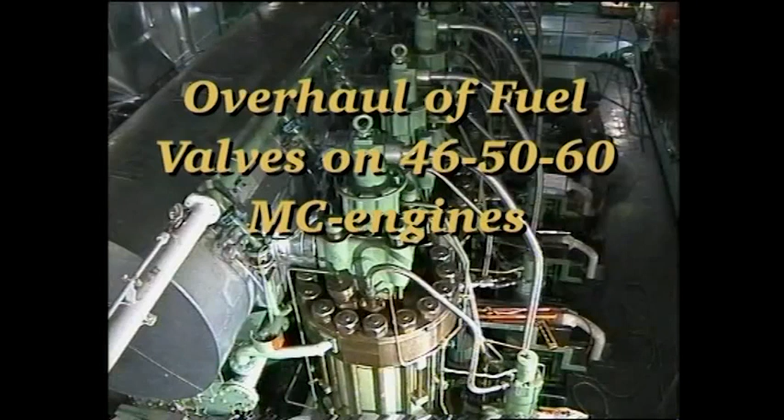Overhaul of fuel valves on 46, 50 and 60 MC engines. See Instruction Book, Volume 2, Procedure numbers 901 and 909.

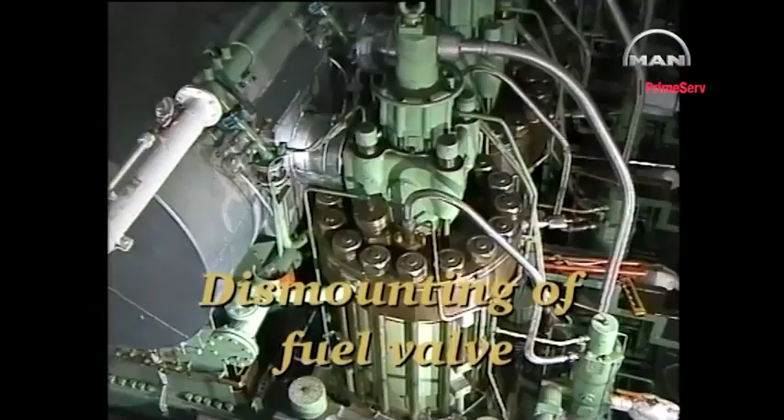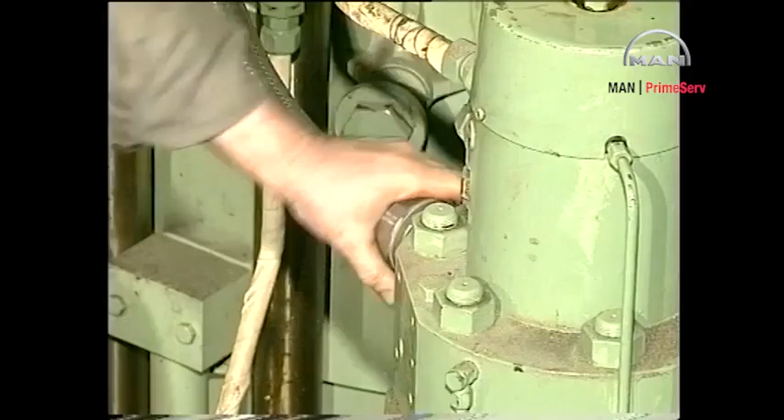Before any dismantling, drain the fuel oil from the fuel oil high pressure pipes. Using a hook spanner, loosen the union nut. Using a spanner, loosen the coupling pieces fitted on each end of the high pressure pipe.

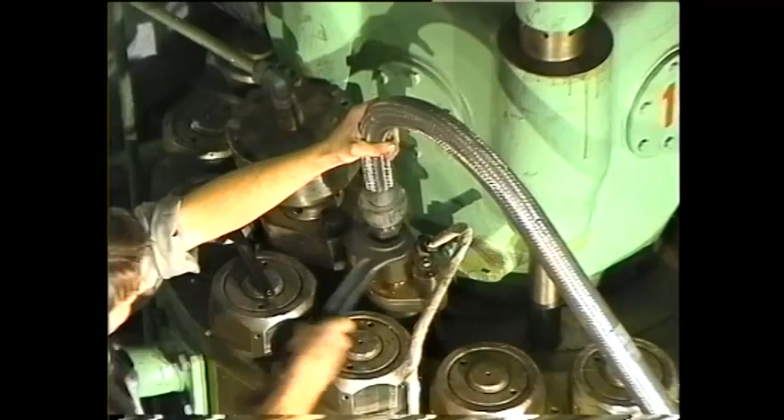The fuel oil high pressure pipes may also be of the double pipe design. See Instruction Book, Procedure numbers 901 and 909. Remove the high pressure pipe, taking care not to damage the high pressure pipe seatings.

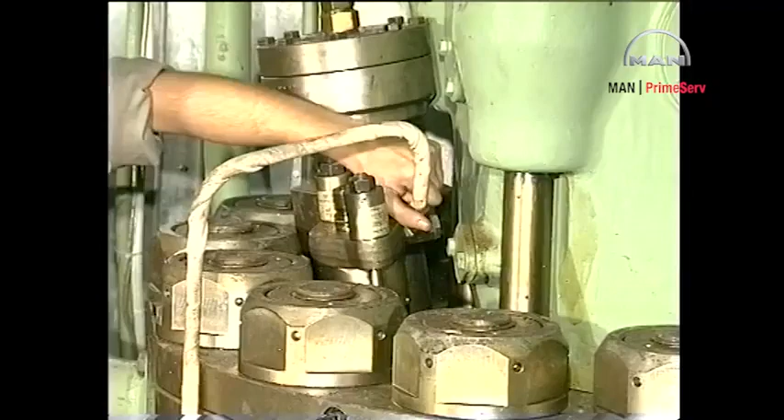Disconnect the return oil pipe from the fuel valve. Mount protective plastic plugs in or on all high pressure seatings. Unscrew the retaining nuts and remove the spring housings.

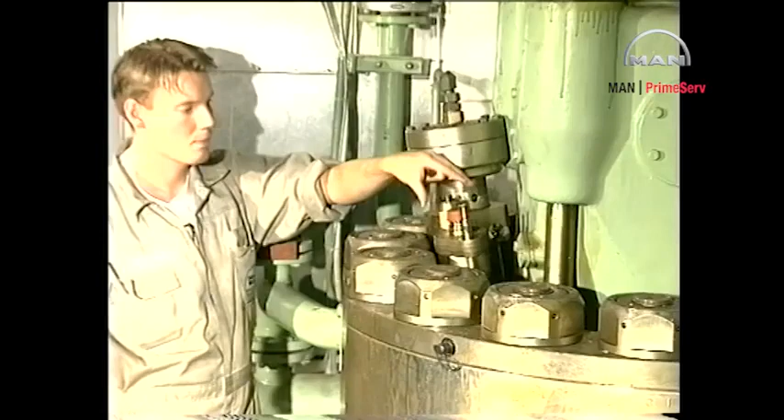Remove the fuel valve from the cylinder cover using the lifting tool if the valve sticks.

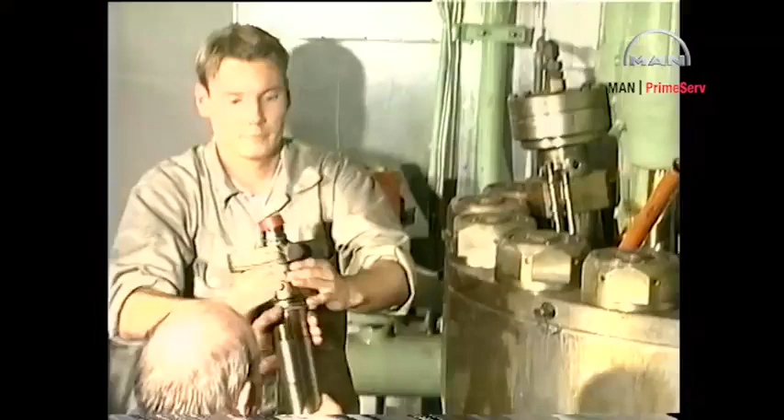Thoroughly clean the fuel valve bore in the cylinder cover. Clean off any carbon deposits in the fuel valve bore with a carbon cutter.

If marks are found on the seating in the bore, recondition the seating with a seating face cutter. Finally, grind the seating with a grinding mandrel and a grinding compound, for example carborundum number 200.

After milling and grinding, thoroughly clean the bore and seating and check again that there are no signs of damage on the seating.

After reconditioning the seating in the bore and thoroughly cleaning both bore and seating, fit new O-rings on a new or overhauled fuel valve which has just been pressure tested, and lubricate with molybdenum disulfide. Carefully mount the valve in the cylinder cover.

To ensure that over-tightening has not taken place, check that the locking and indicating pins have not been bent or broken off.

In the event of over-tightening, mount a new spring housing.

We recommend that the calibration of new and especially old spring housings be checked before they are mounted on the engine or on the fuel valve test rig.

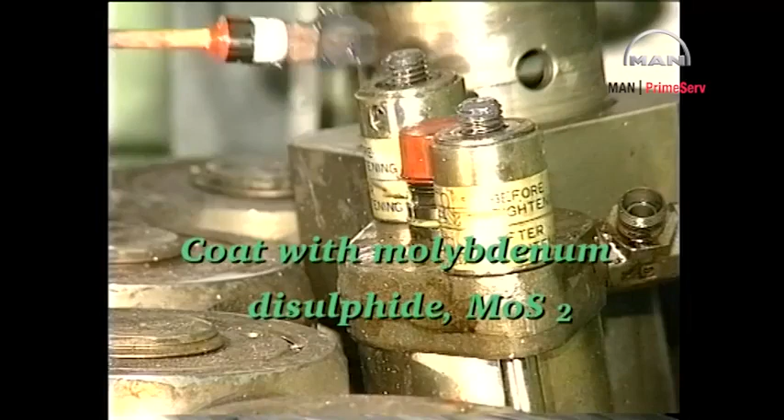Mount the spring housings and retaining nuts. Tighten the nuts until the top face of the pressure disc is flush with the top face of the spring housing.

Reconnect the return oil pipe to the fuel valve.

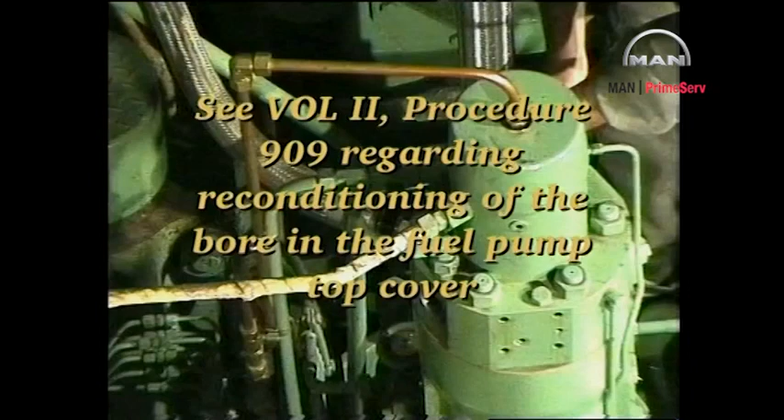Check that there are no marks on the seating surfaces of the fuel oil high pressure pipe. If necessary, recondition the seatings as described in procedure number 909.

On fuel oil high pressure pipes which are provided with a steel armoured protective hose, also check distance D, that is between the thrust bushing and the pipe end. See procedure number 909.

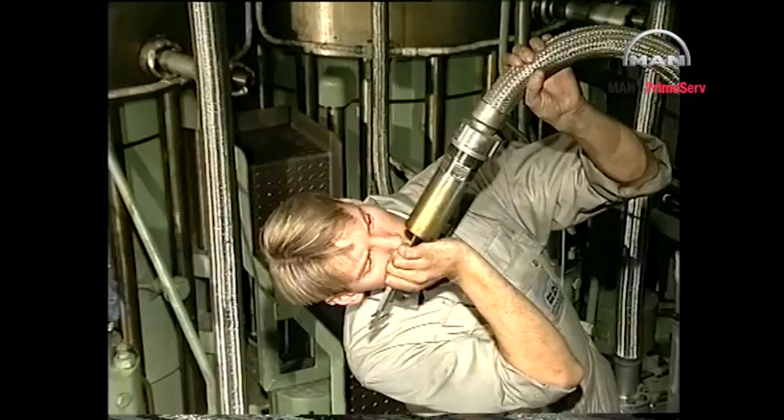Replace the O-rings and coat with molybdenum disulfide. Mount the fuel oil high pressure pipe.

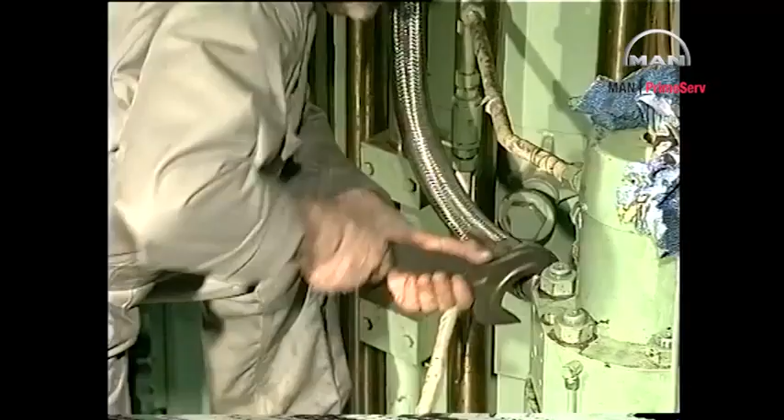Adjust the torque spanner to the value indicated in procedure number 901. Tighten the coupling pieces using the torque spanner. Using the hook spanner, tighten the union nut.

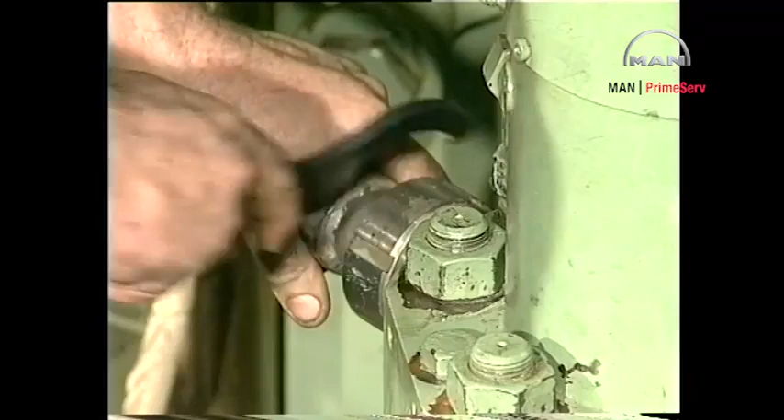Close the fuel oil drain valve. Turn on the fuel oil supply.

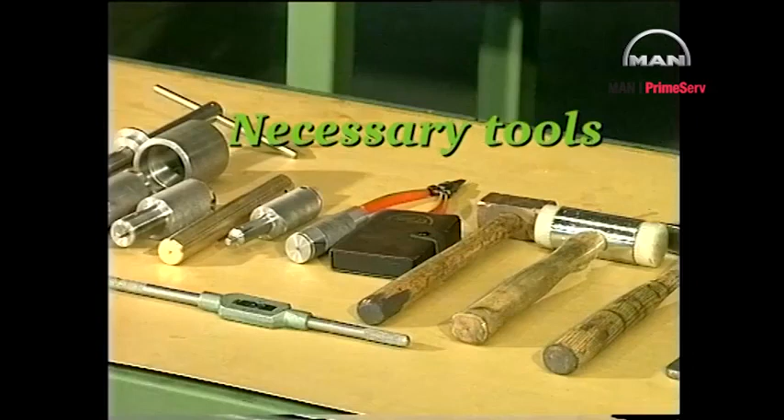Remove and discard all sealing rings. Fit soft jaws to the bench vise. Set up the fuel valve.

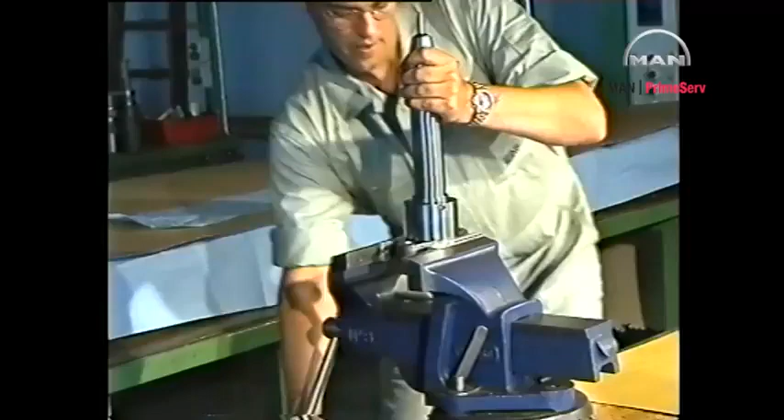Start disassembling the fuel valve by screwing off the union nut with a hook spanner. Slide the valve head clear of the valve housing.

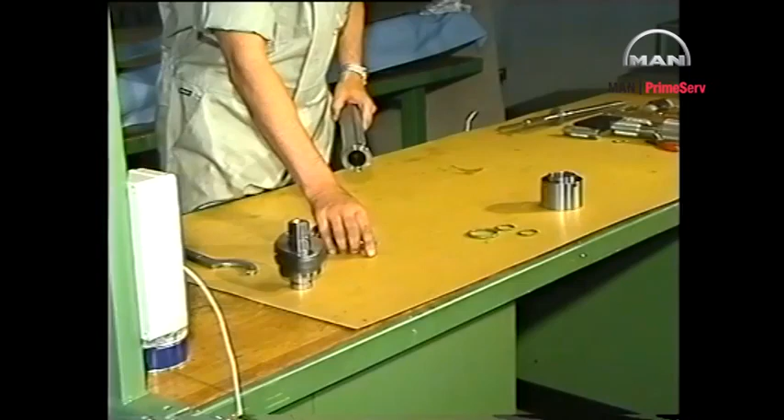Remove the thrust spindle and thrust foot from the valve housing. Loosen the spindle guide with a soft hammer, and remove the spindle guide and nozzle.

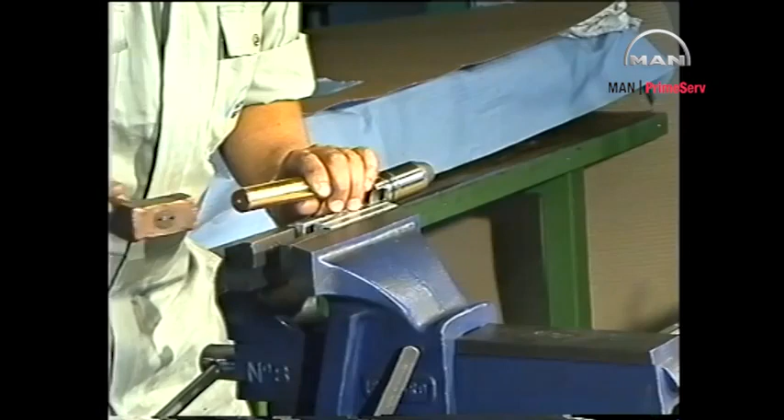Remove the sealing ring from the spindle guide. Disassemble the spindle guide with a brass mandrel and a hammer.

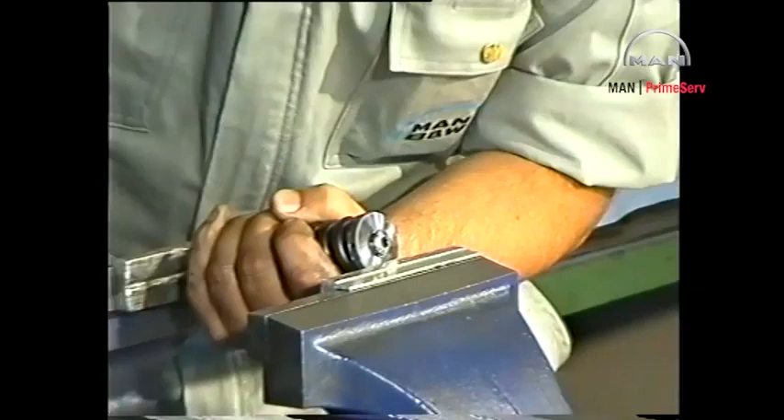Set up the thrust spindle in a bench vise with soft jaws. Compress the spring for the thrust spindle to remove the tension on the circlips, and then remove the circlips.

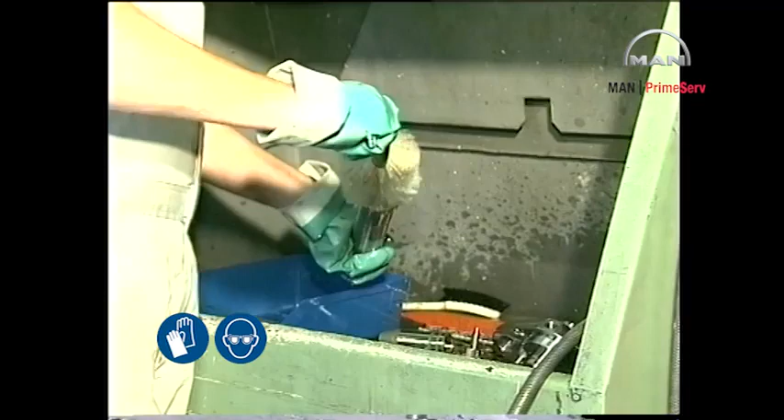Clean all parts in gas oil and blow clean with compressed air. Carefully clean and examine the parts and, if necessary, grind the seating surfaces with a grinding mandrel and carborundum number 500.

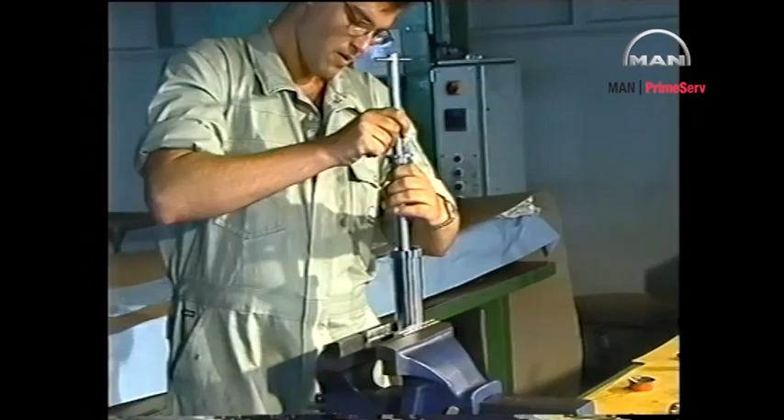Use a torch to inspect the internal seating surface of the valve housing.

Use the milling tool if more serious damage has occurred on the seating surface for the high pressure pipe in the valve head.

The diameter of the seating surface must not exceed the value stated in procedure number 909 in volume 2 of the instruction book.

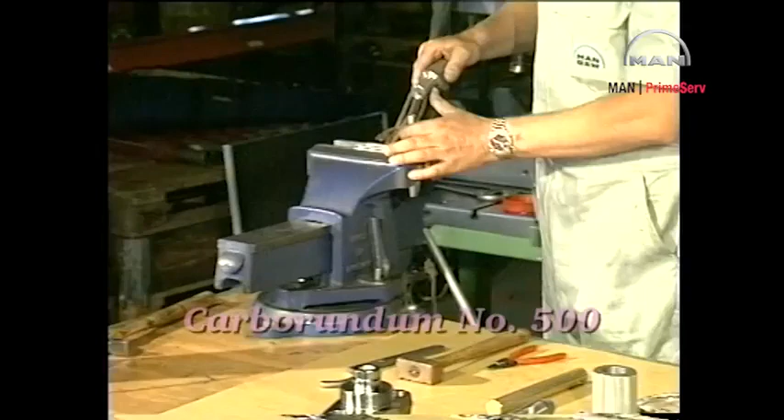After grinding and lapping, clean the parts in gas oil and blow clean with compressed air.

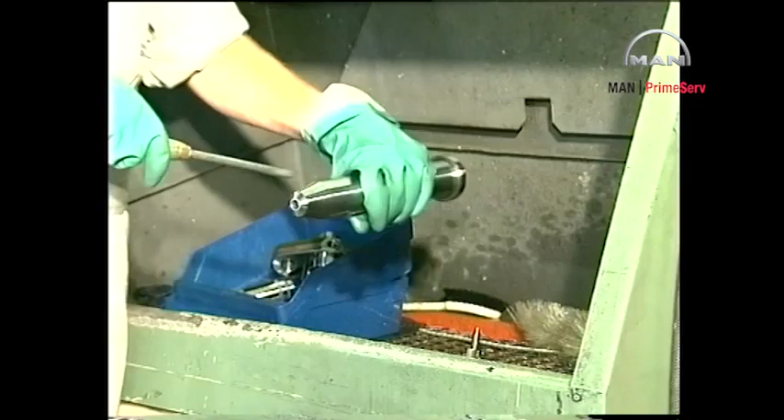Inspect all spindle guide seating surfaces through a magnifying glass. If pressing in marks or the like are found on the seating surfaces, mount a new spindle guide.

The lapping of internal parts is not acceptable. Individual defective parts cannot be replaced except for the spring.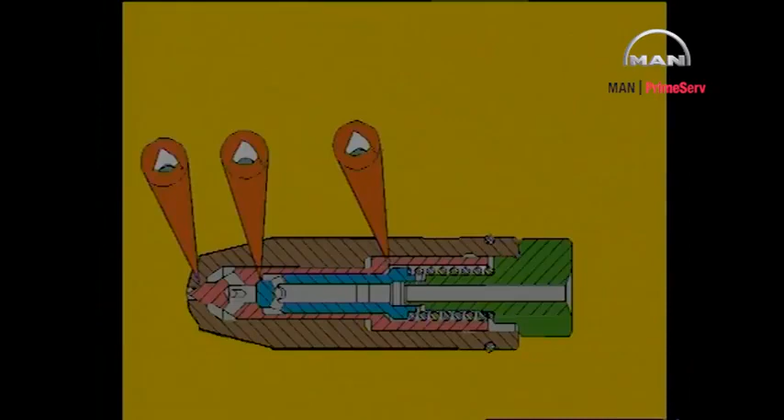Remove any deposits on the sliding surfaces with a grade 360 emery cloth and oil.

Use the special drills to clean off any carbon deposits in the central bore of the fuel valve nozzle or in the spray holes.

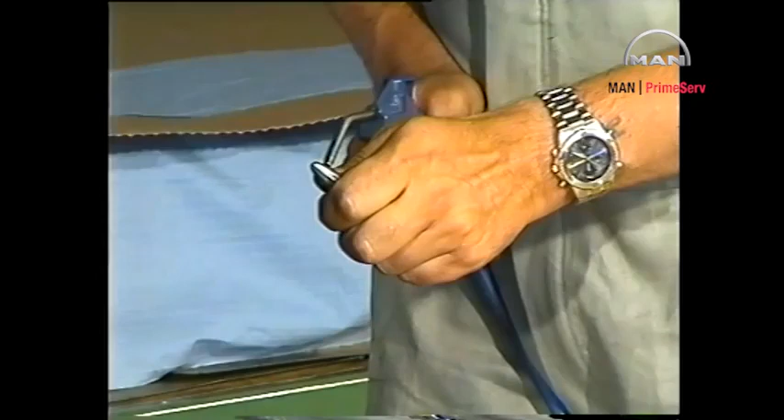Test the spray holes with a test pin. If the test pin can be inserted into just one of the holes, or if the holes have become oval, the fuel nozzle must be discarded.

Loosely assemble the spindle guide. Lubricate all movable parts with molybdenum disulfide.

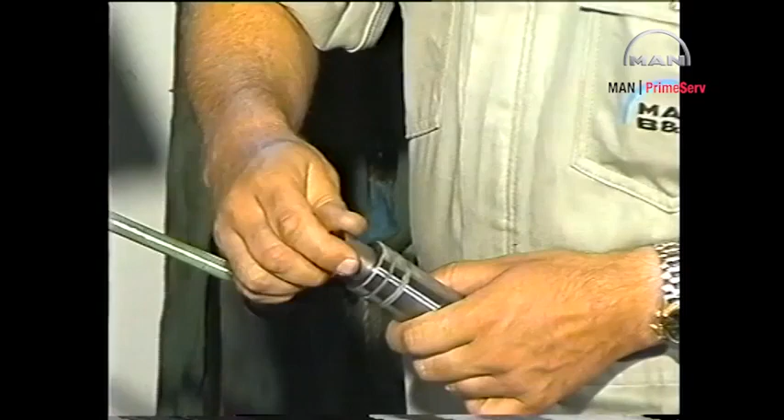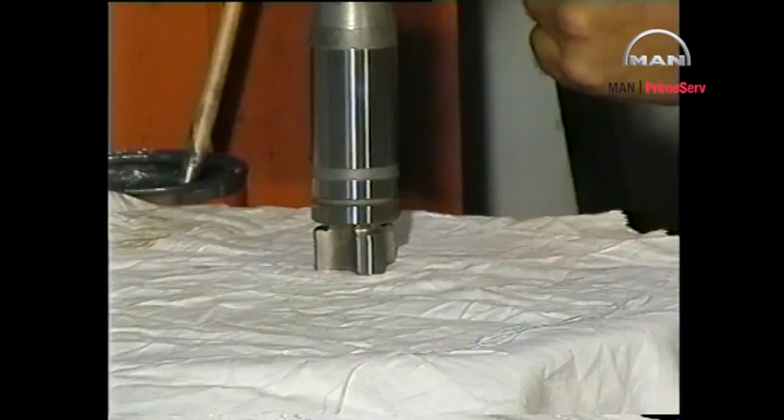Make sure that the parts are perfectly aligned and position the special tool. Fit the parts firmly together by pressing down on the drilling machine handle. Move the handle of the drilling machine up and down to check that the internal parts are able to move freely.

Starting with any additional discs, assemble the thrust spindle. Slightly compress the thrust spring and mount the circlips.

Mount the fuel nozzle in the valve housing, making sure that it engages correctly with the guide pin. Mount a new sealing ring on the spindle guide. Coat with molybdenum disulfide and mount the spindle guide and thrust foot.

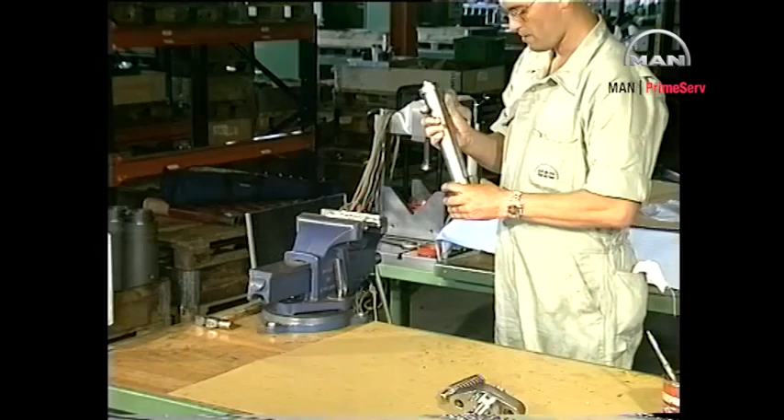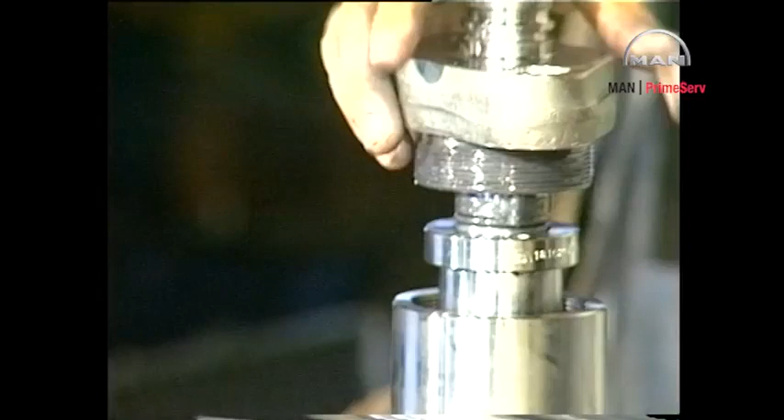Mount the thrust spindle with the circlips facing the spindle guide. Mount a new sealing ring in the sealing ring groove. Mount the valve head, ensuring that the guide pin between the valve housing and valve head is correctly engaged so that it will prevent the parts from turning in relation to each other.

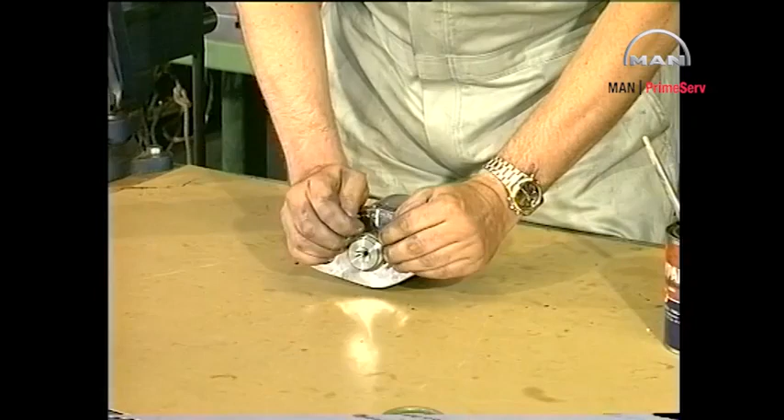Mount the union nut and tighten it with a hook spanner. Mount new sealing rings on the valve head and valve housing and mount protective plastic plugs.

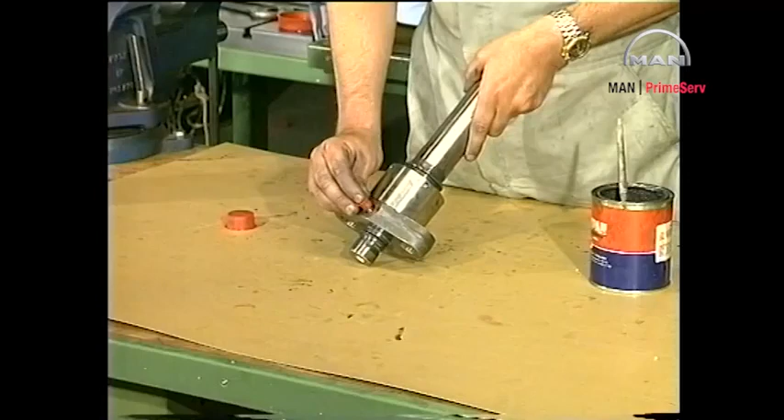Overhauled fuel valves or fuel valves taken from stock must be function tested before they are mounted in the cylinder cover. The pressure testing pump is equipped with pressure gauges for displaying opening pressure, working pressure, venting function, and air inlet pressure.

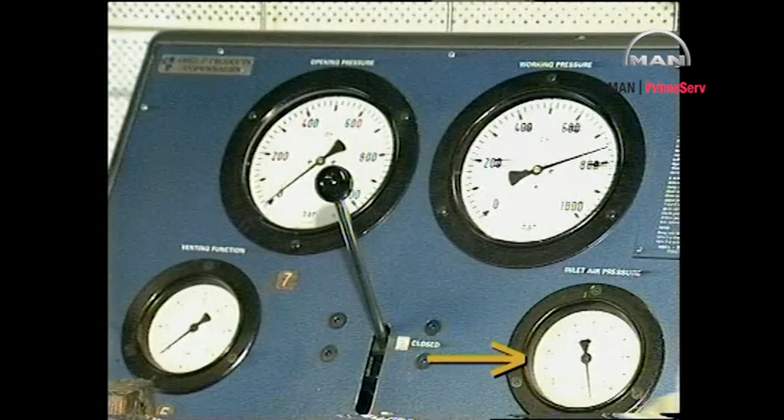Position the fuel valve in the test rig. For guidance on how to operate the pressure testing pump, refer to the supplier's special instructions.

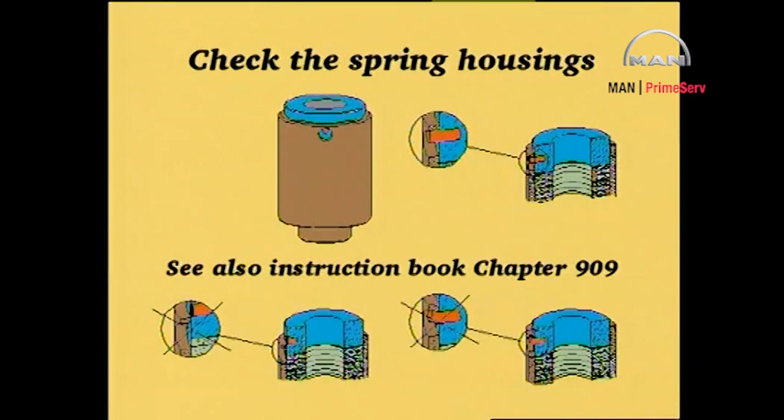To ensure that over-tightening has not taken place, check that the locking and indicating pins have not been bent or broken off. In the event of over-tightening, mount a new spring housing.

A very important element in the correct functioning of the fuel valve, both during testing and in service, is ensuring that the spring housings apply the predetermined tightening force. To ensure that this force is present, a special tool has been designed to check the calibration of the spring housings. We recommend that the calibration of new and especially old spring housings be checked before they are mounted on the engine or on the fuel valve test rig.

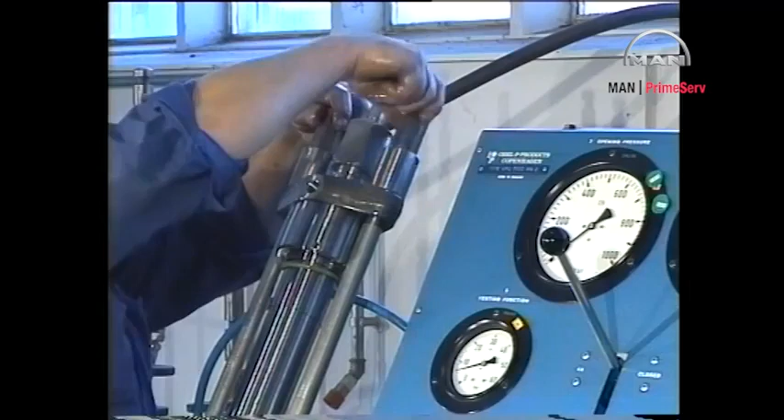Tighten the nuts until the top face of the pressure disc is flush with the top face of the spring housing.

Connect the pressure testing pump and the return oil pipe to the fuel valve. Slowly fill the valve by pumping at low pressure until oil, without air bubbles, flows from the return oil pipe.

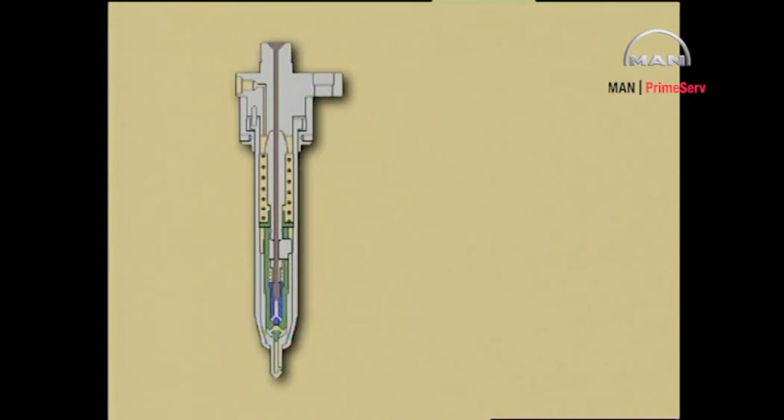Raise the pressure until it is above the opening pressure.

Flush the valve for about 5 seconds.

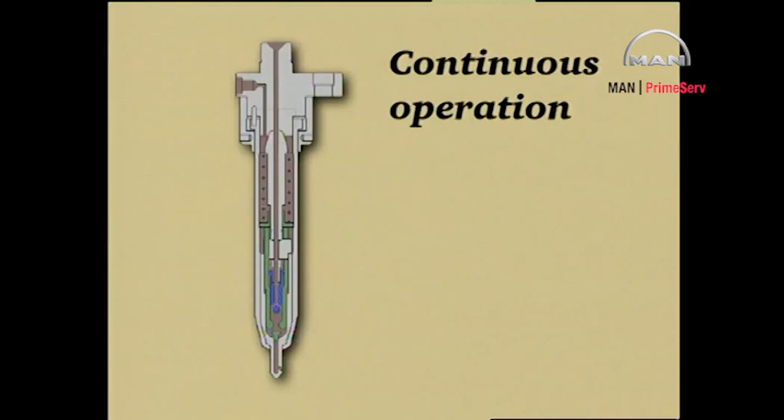Slowly increase the pressure until it is about 50 bar below the specified opening pressure. See Instruction Book Volume 2, Procedure number 909.

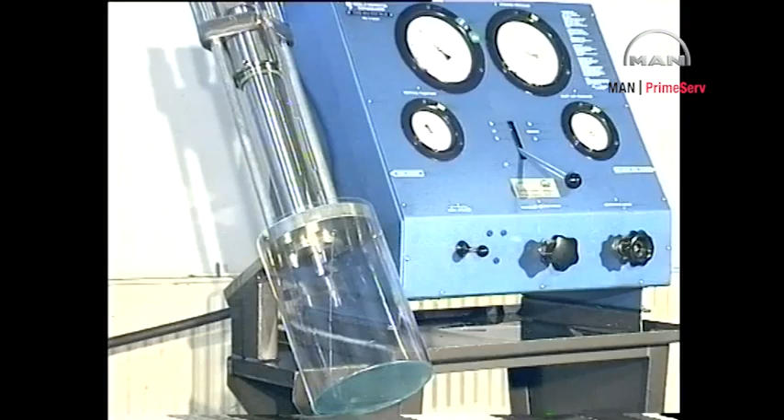There will always be a certain amount of oil flowing from the return oil pipe when the fuel valve is full of oil and pressurized. Oil must not seep from the fuel valve nozzle holes until reaching a pressure of 50 bar below the specified opening pressure. If oil does seep from the fuel valve nozzles, see Procedure number 909.

Lapping of the internal seatings is not acceptable. Pump 5 to 10 strokes to fully open the valve and to blow out any dirt. Then relieve the pressure.

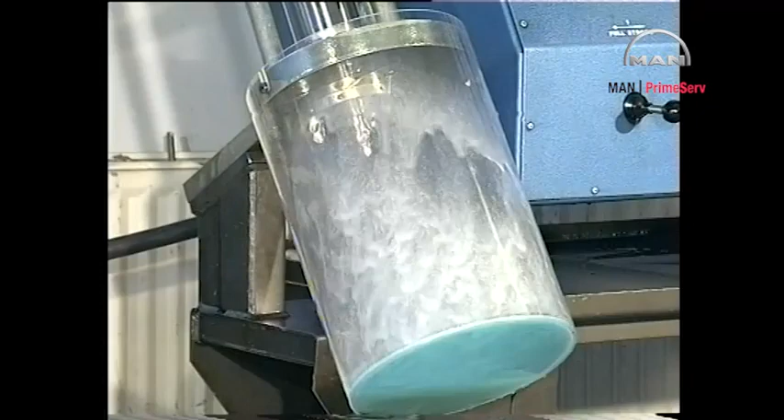Slowly increase the pressure until oil is emitted from all the atomizer holes. Read the actual opening pressure on the pressure gauge marked opening pressure.

Compare the actual opening pressure with the pressure specified in Procedure number 909 and, if necessary, insert or remove discs or replace the spring.

Set up the thrust spindle in a bench vise with soft jaws. Compress the spring for the thrust spindle to remove the tension on the circlips and then remove the circlips.

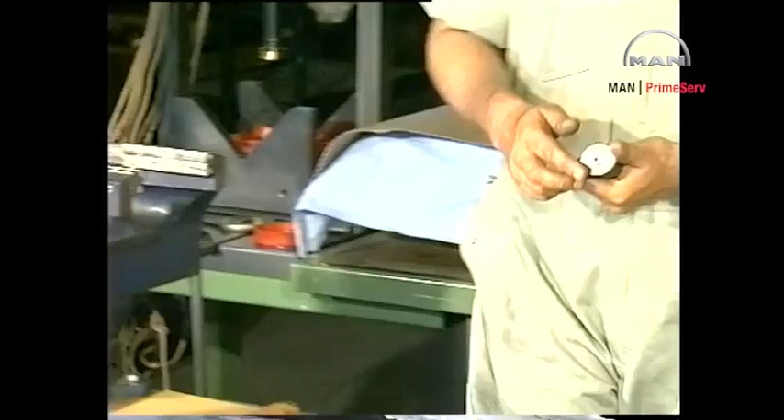Starting with any additional discs, assemble the thrust spindle. Do not insert more than 5 extra discs when adjusting the pressure.

Slightly compress the thrust spring and mount the circlips. The fuel valve must be retested after any adjustments.

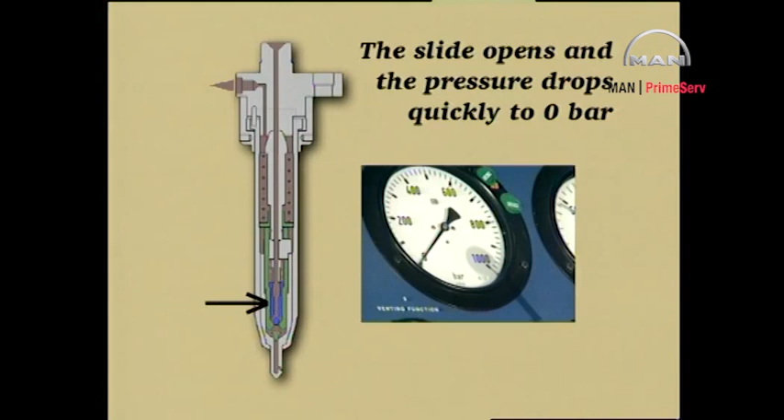If the quick pressure drop cannot be registered, the slide is sticking or the hole is blocked. Disassemble and examine the parts, replace if necessary.

Slowly fill the valve by pumping at low pressure until oil, without air bubbles, flows from the return oil pipe. Remove the return oil pipe and block the outlet hole with a gasket and a plug screw.

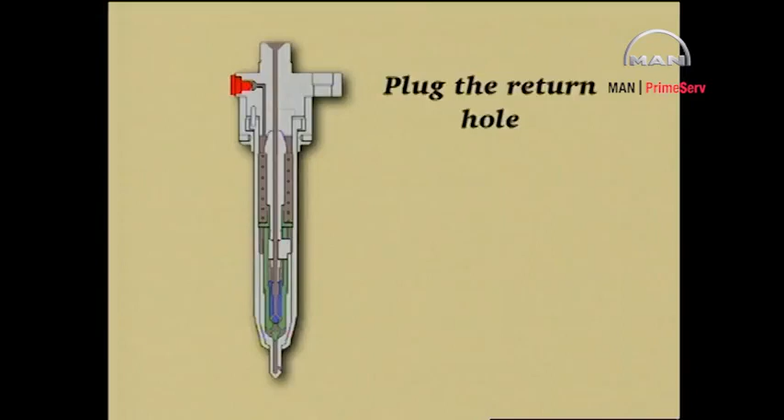Increase the pressure to about 100 bar and move the control handle to the closed position. The pressure should now remain at 100 bar.

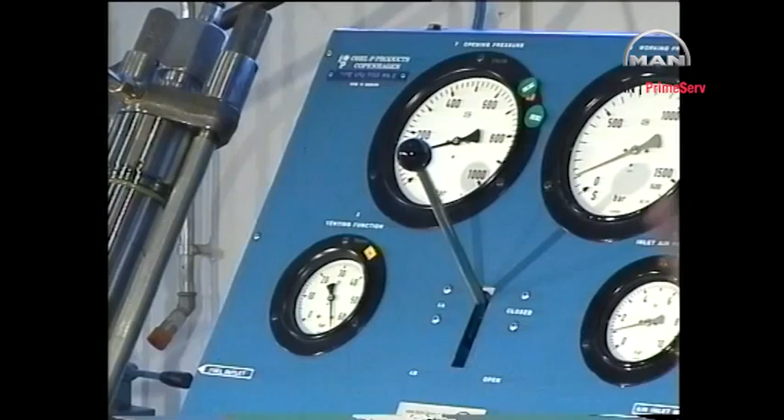If oil leaks at the union nut, replace the O-ring seal of the valve head. If oil leaks at the lower end of the valve, replace the O-ring seal on the spindle guide. After the fuel valve has passed all the tests, it can be mounted in the cylinder cover.